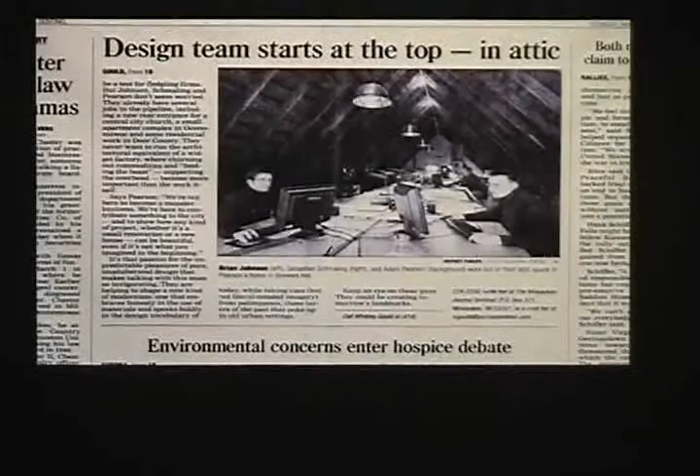This happened the week after we officially opened our business, and the journal ran this story about us — young guys starting a new design studio in an attic. In fact, it was through this very article that we got our first two commissions. You can imagine the pride, seeing this big picture of our office space in the attic in the newspaper. But it was that same image that triggered a chain of unfortunate events that almost did us in before we could get fully operational.

What happened was that somebody, and we have our suspicions who, saw the picture and contacted the city to complain about us operating a business out of a home on 2nd Street. It turned out that was totally illegal, against all zoning rules, as well as all the electrical wiring we'd done after hours without pulling proper permits. Really great start for young architects to prove their acumen. The inspector who showed up to survey the crime scene was not amused, and a few days later we received an official eviction notice forcing us to abandon the attic immediately and find a new space for our studio. That was barely two weeks after we had started.

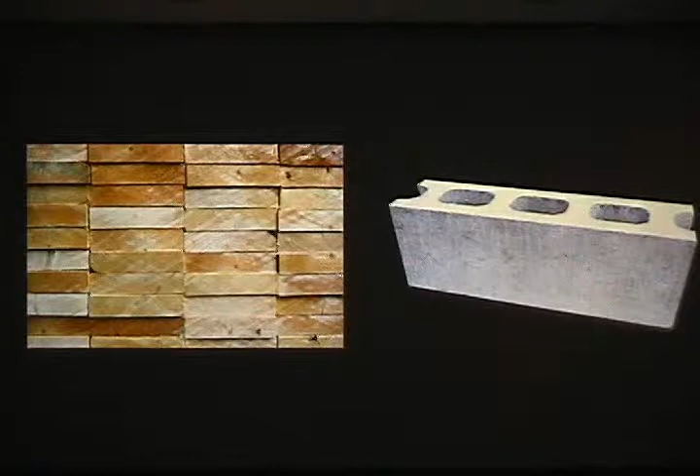I think part of what is getting lost in this current dynamic is our ability to hold on to the concept of restraint and simplicity as fundamental architectural virtues. We are losing our ability to make do with what is at our direct disposal and within our reach, like dimensional lumber, concrete block, or standard steel sections, and then to transform these simple things into relevant architecture that transcends the inherent utilitarian nature of these materials.

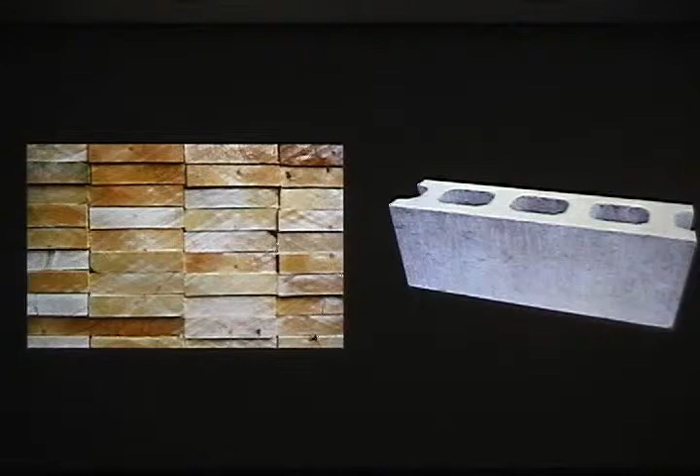Restraint plays a key role in the design process of our office. Brian and I think that restraint is our willingness as architects to approach context again with a sense of humility. It's our ability to step back and to listen respectfully to what exists, and to embrace the idea that a building doesn't have to be flamboyant or outrageous or loud in order to be relevant architecture.

I believe it's that willingness to listen which ultimately allows a building to connect to the landscape so that it evolves out of it rather than just sitting on it as a self-referential object. And I suppose this is what we are trying to do in our work.

So let me jump into a handful of projects that I hope will illustrate our attitude. The Camouflage house was completed about at least 7 years ago. So it's been a while, but I think it's still a good example of how we approach context and try to transform it into a palette of architectural operations that inform the design of the building.

The site for this project is a heavily wooded, narrow sliver of land on a steep bluff overlooking Green Lake, which is about 2.5 to 3 hours up north here from Milwaukee.

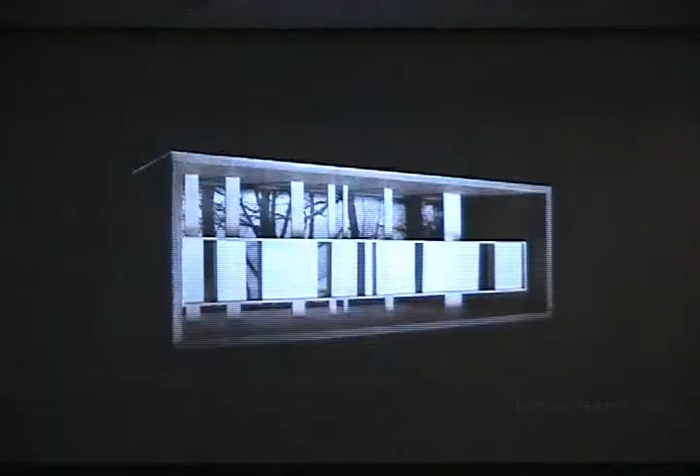Our early conceptual studies focused on the colors and textures of the surrounding woods, starting with the verticality of the trees. One of the conceptual models that we made was this shadow box, where we explored the rhythmic shifts between tree trunks as you move through the forest.

Captured here in a series of photographs where we illuminated the model from behind, you can kind of see how the foreground shifts against the background. It was something that we found sort of fascinating, and something we tried to capture in this building.

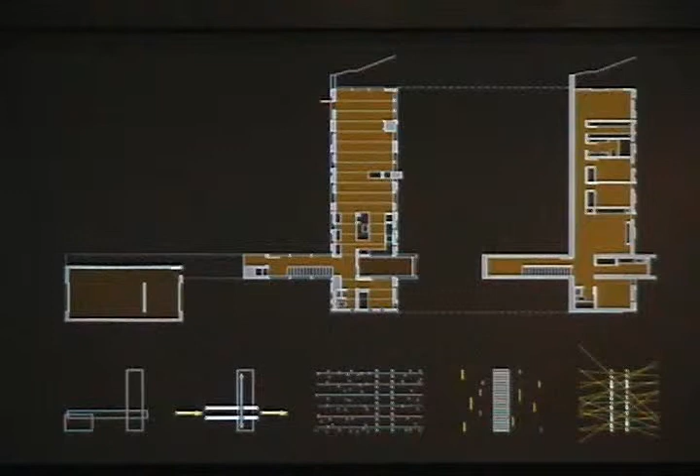The house is a simple bar building nestled into the hill. In plan, you enter the house from this clearing here. There's a detached garage connected with an open breezeway to a glass foyer that pierces through the main bar and then terminates into this balcony overlooking the bluff. The main level itself, where you enter, is an open living hall with kitchen, dining, and living spaces. That open space can extend into the top portion of the bar, which is a screen room separated by the living hall with a retractable glass door.

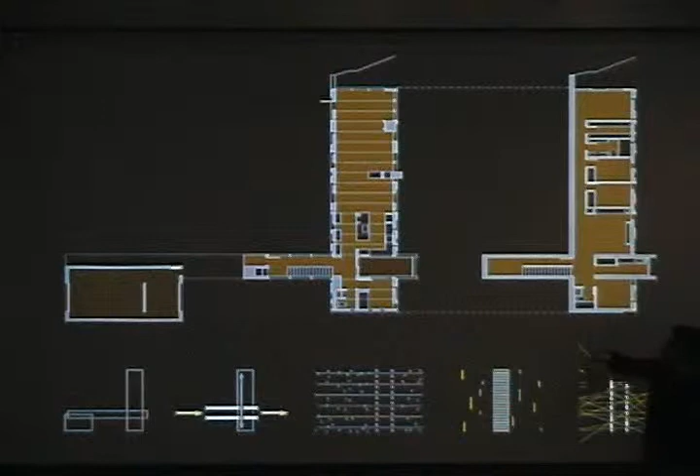Then you go down the stairs into a partially submerged lower level. It's open to this side, and then there's a long retaining wall. There are bedrooms and a family room, and then access to the bluff itself.

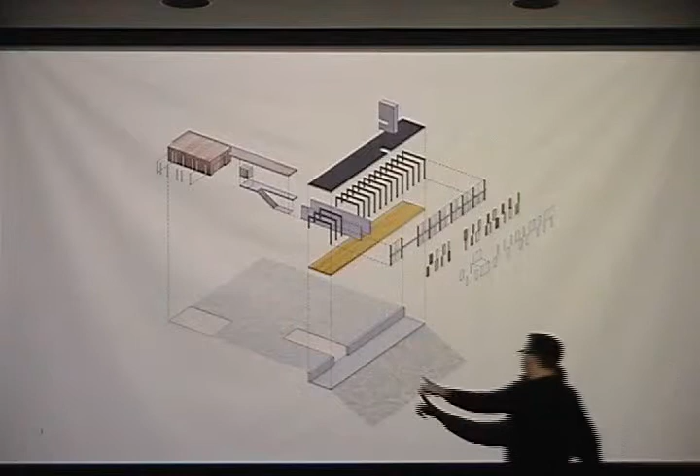This axon here shows the main building components, including the various layers that make up the facade system. You can see it's a simple post and beam structure that sits on a concrete shelf that forms a retaining wall cut into the hill. In the model, it shows the sectional relationship between the bluff side and the clearing, the higher portion of the building where you enter.

The concrete retaining wall we saw comes from that concrete shelf shown earlier. We added wood boards to the formwork, including wider boards that pick up the structural lines of the house, with smaller, more narrow boards randomly spaced in between. We then pulled the boards off the concrete formwork slightly before it was fully cured to achieve a rugged surface, and filled some of the reveals with new milled wood boards to increase the haptic quality of the wall, since that's the wall you walk by entering or going into the bedrooms on the lower level.

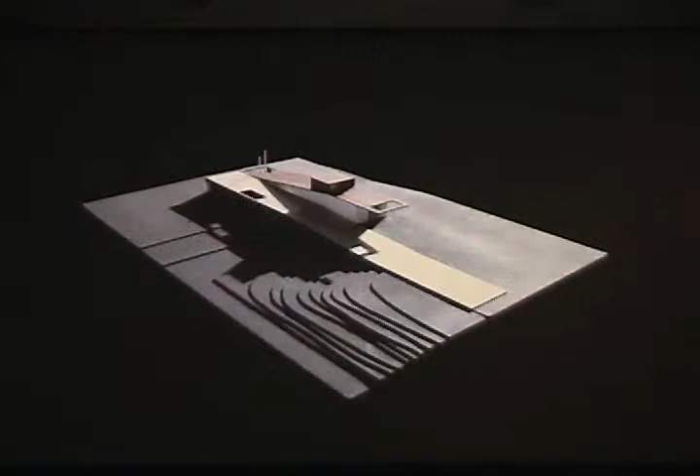This was followed by several generations of study models in which we transformed that first abstract concept study into a more tangible building form, until we inserted program elements and arrived at two staggered parallel bars that form a low-slung volume with a roof plane that extends the grade over parts of the house and then slowly peels itself up from the ground.

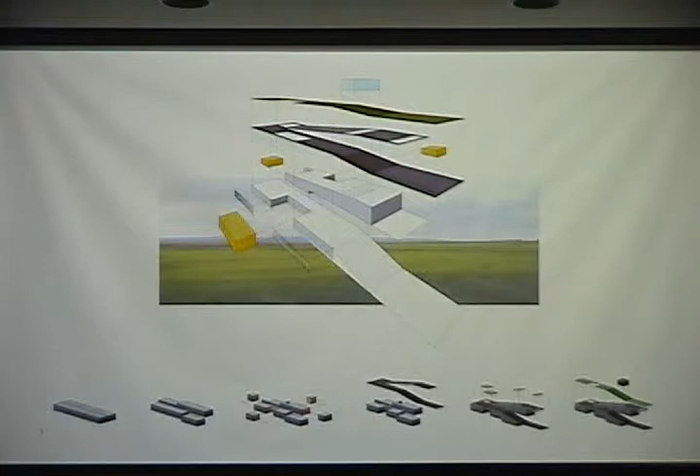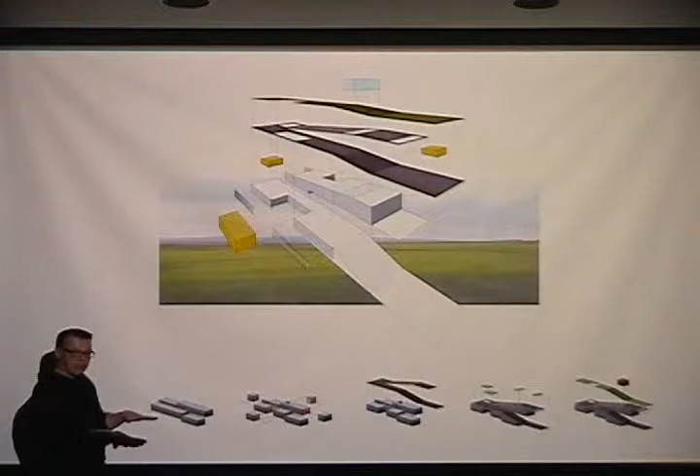The series of diagrams here at the bottom show the formal evolution of the building. We divided the program up into 4 separate volumes that we started shifting vertically against one another, following the topography of the site.

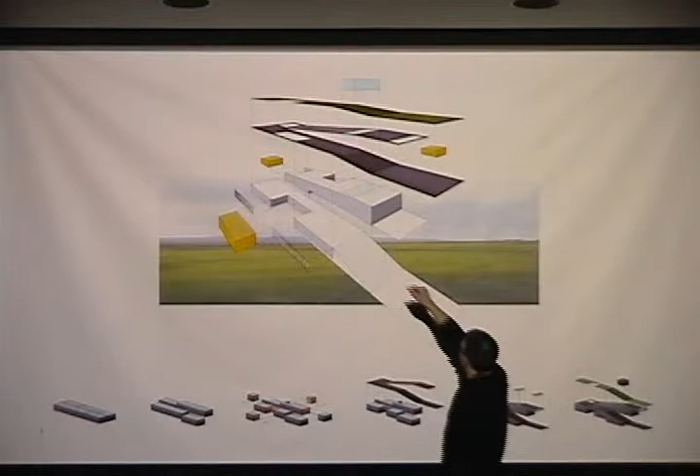Then we pulled these yellow volumes out of the overall form of the building, which became outdoor rooms that provide protection from the strong winds that are constantly shifting in this area, providing protected areas accessible from the inside.

The volumes and courtyards are then unified by this gently rising copper roof ribbon that you see in the axon, that brown element, folding up from the ground plane and terminating in a dramatic cantilever. Then you see the green roof that laps the vegetation from the side over the lower portion of the building, tying those two elements together.

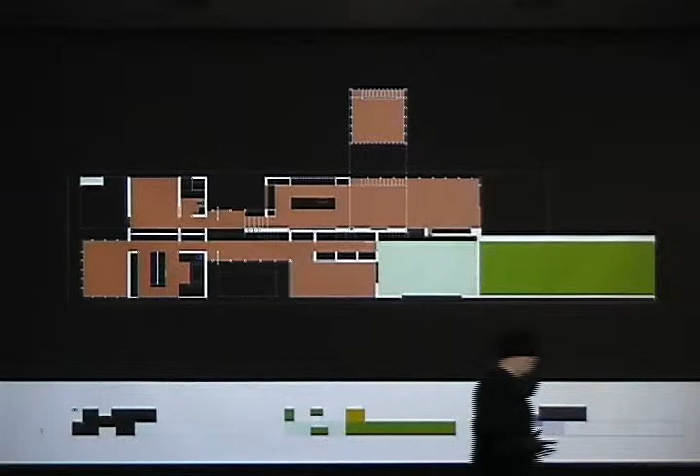The plans here show the relationship of enclosed and open spaces with a central spine that connects them. The diagram at the bottom is basically a Nolli plan of our project, and you can see this ambiguous footprint that the house has, which subverts the boundaries between what's inside and what's outside.

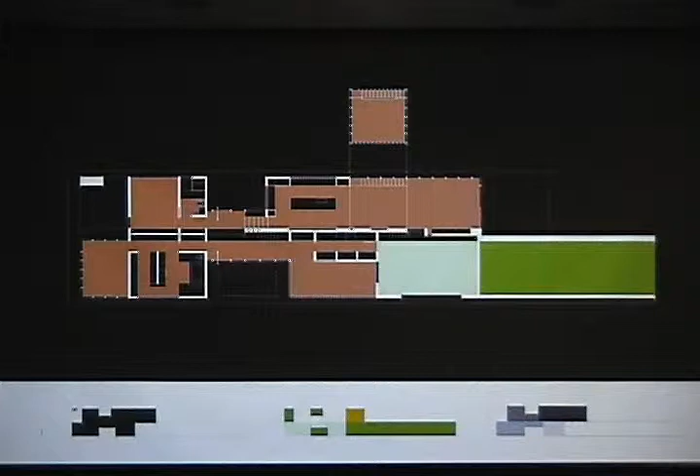The last diagram in the right-hand corner shows the different floor plates in different shades of gray, changing elevations in relation to one another. These floor plates rise up along with the topography of the place where we positioned the house, with the light gray showing the lowest elevation, and the dark gray the part of the building at the highest point.

The section model at the top shows a little bit of that internal topography that these shifting floor plates create as they follow the site topography, with this observatory at the very top.

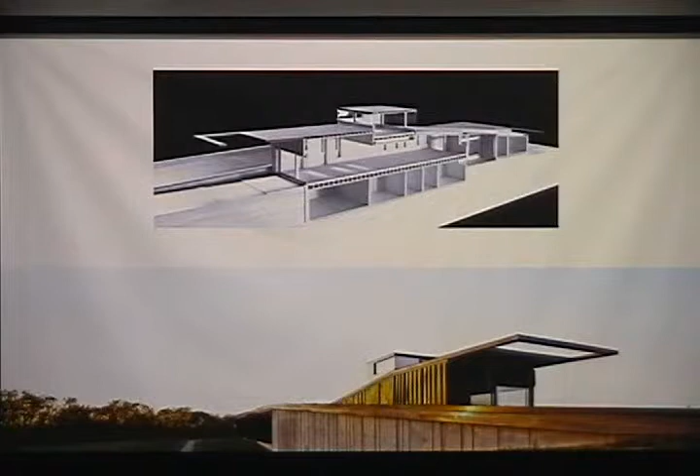At the bottom, we are looking at the edge of the roof plane. You can see that copper line that is basically continuous and slowly rises up over the lower part of the building, then folds back before it cantilevers over the edge of the house.

This is a view standing on the lower green roof looking south, and you can see where it turns into that folding copper roof plane as it slopes up in the back of the observatory.

And the living room then opens up to a south-facing patio that is protected by the long roof cantilever. The material palette of the building is basically limited to cast-in-place concrete, copper, and integrally colored fiber concrete panels, all materials that are extremely durable and can weather and age gracefully.

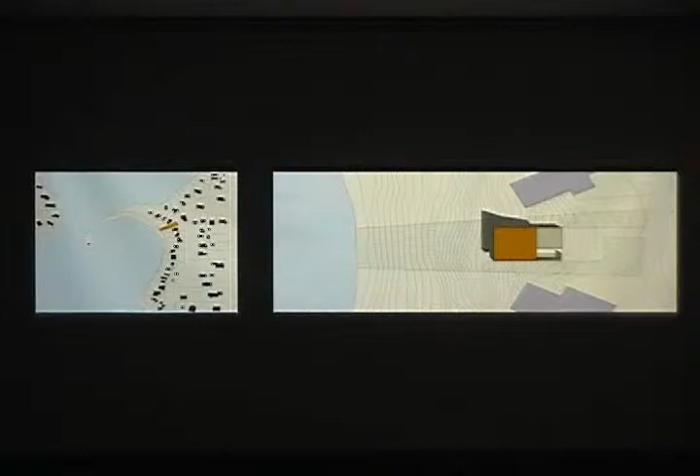And so in a way, this project became an exercise in context avoidance, if you will, and it compelled us to design an introvert building that could basically function as an optic filter that would frame the views that are desirable and then edit out those that were not.

The courtyard leads to a transparent front door that again is framing a view of the lake beyond. And in the courtyard, you are basically in a transitional space that takes you from the suburban reality on the outside into an aesthetically controlled realm.

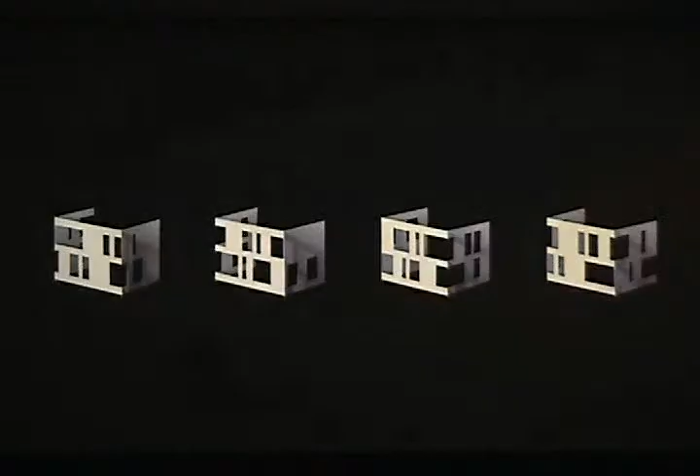So for us, this meant conceptually to take the existing context and censor everything we wouldn't want to see. This conceptual graphic became the starting point for a series of study models of the building envelope itself, which helped us explore which arrangements of walls and windows would harvest the most unimpeded views, and ultimately what they would do compositionally to the exterior.

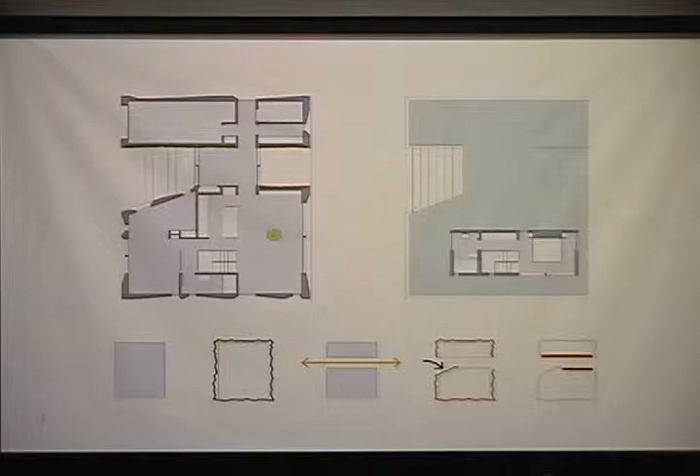This cedar wall leads into the entry vestibule, pierces through the volume, and reappears on the outside here, in a covered outdoor room on the opposite side of that entry courtyard we saw. That room opens up into a long linear patio along the edge of the woods.

The concrete podium was carved into the hill - I'm talking here about that diagram to the left. That concrete podium was carved into the hill, and it provides storage space for equipment, and also serves as the base supporting the linear studio volume above.

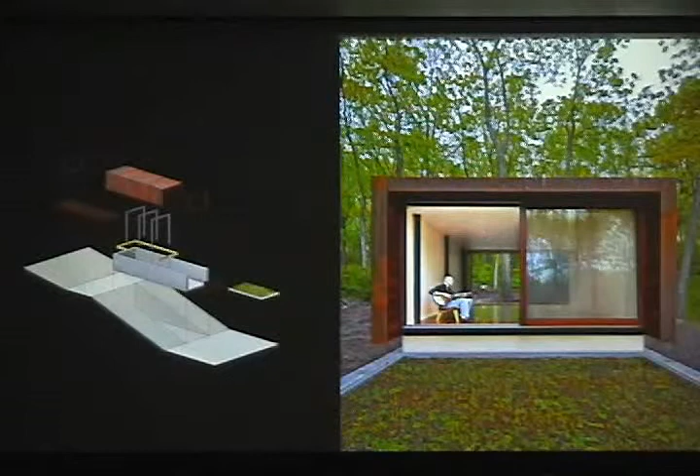The long sides of that volume are covered by the weathering steel shroud, which is slightly lifted off the concrete plinth to reveal a narrow clerestory below. With this clerestory, we allowed the studio volume to seemingly float above its base, but also to provide natural light into the storage space below, and to emit a sort of luminous glow into the landscape at night.

The plan view of the studio: a very simple rectangular space with large glazed openings on either end, here to enter into the studio, and here to go onto the green roof of the concrete plinth.

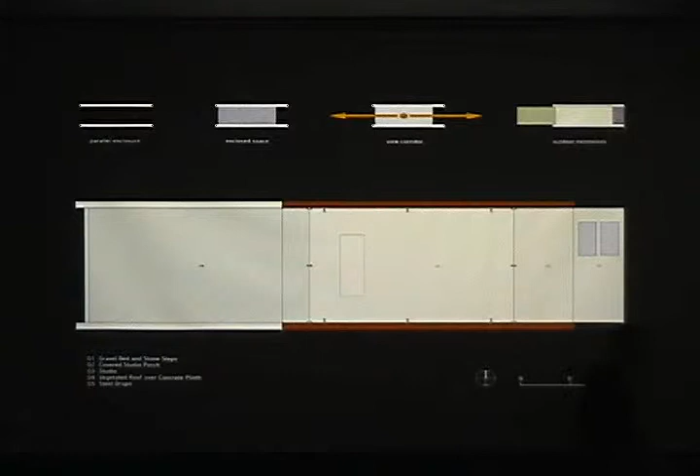For the steel shroud, we purposefully kept all the alloy imperfections, surface oils, and roller marks from the steel mill untreated, to create a sort of unpredictable and ever-changing veneer that would contrast with the formal rigor of the building itself.

The thing about this project is that it's utilitarian and raw, and it is very clear about what it does, and in that sense we think it continues quite faithfully the tradition of Midwestern pastoral architecture and its legacy of aesthetic simplicity and robust craftsmanship. I think this is why the building looks like it belongs to the site, almost like it's always been there.

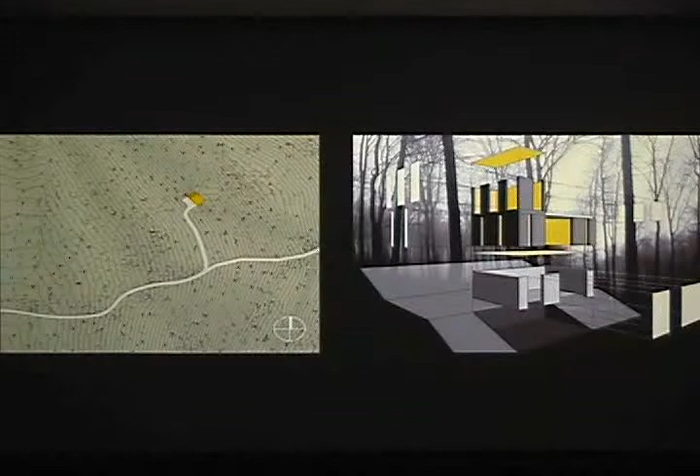This next project was designed as a small getaway for a young family from Chicago. Just like the studio, it occupies a site in the woods in central Wisconsin. The building sits at the end of an old logging road and hugs the sloped edge of a small clearing deep inside the woods. We called this project Stacked Cabin.

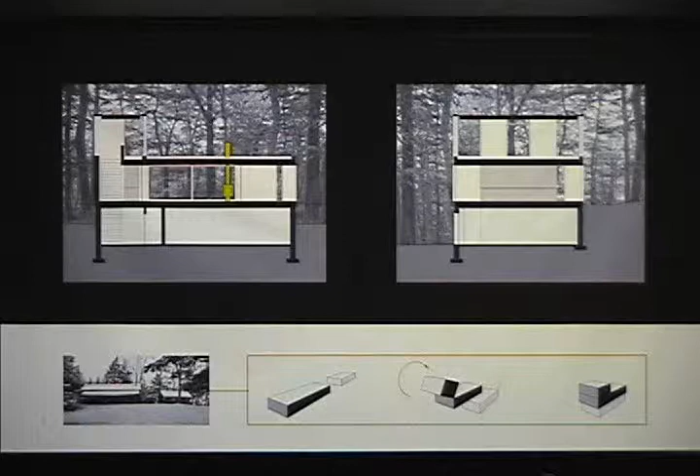We took those components and stacked them vertically, which allowed us to minimize the footprint of the building on the pristine site, and then take advantage of the slope of the site and the views into the treetops that a higher elevation would offer.

The lowest level of the cabin houses a workshop, a washroom, and the building infrastructure. You enter the building through this door, and there are stairs right behind that lead up to an open living hall above. That living hall is centered around a stove and bracketed by a simple galley kitchen on one side and a pair of small open sleeping rooms on the other.

You can see those floor-to-ceiling curtains on either side of that living space, which can be arranged to provide privacy for the bedrooms or visually screen the kitchen when it's not in use.

Then at the top of the cabin, we stacked what was originally conceived as another space adjacent to the living room, to create a more intimate and elevated observatory with pretty spectacular views into the treetops and beyond — a place that can function as an overflow bedroom for guests, or just a way to get away from the action of the kids on the main level.

Okay, so the projects I've shown so far have all been pretty much small scale and mostly residential, which is a pretty honest representation and cross-section of the types of commissions that we have worked on over the first decade of our studio's existence.

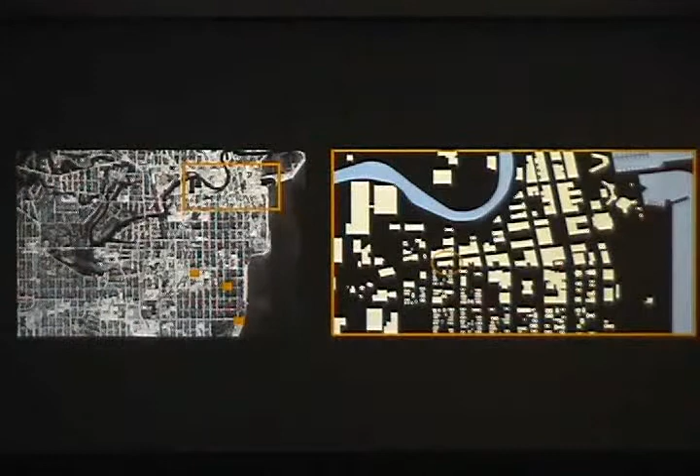In any case, I'm not going to talk about this project anymore, but the new art gallery and art studio building will sit on a site located a bit further up north in the downtown area of Racine.

What's interesting about our site is that it's located right where 2 major street grids in Racine collide, one gridding the city at a slightly different angle than the other. And where they collide, they create a sort of row of trapezoid or rhombus-shaped blocks.

This graphic here, by the way, was a representation of the ambition of the owner to create a cultural anchor at the western side of downtown. It sort of brackets downtown with the Racine Art Museum, a pretty handsome building by Brininstool + Lynch from Chicago. It's probably 10 years old, but probably one of the nicer buildings of contemporary architecture in Racine since the demise of Frank Lloyd Wright, of course.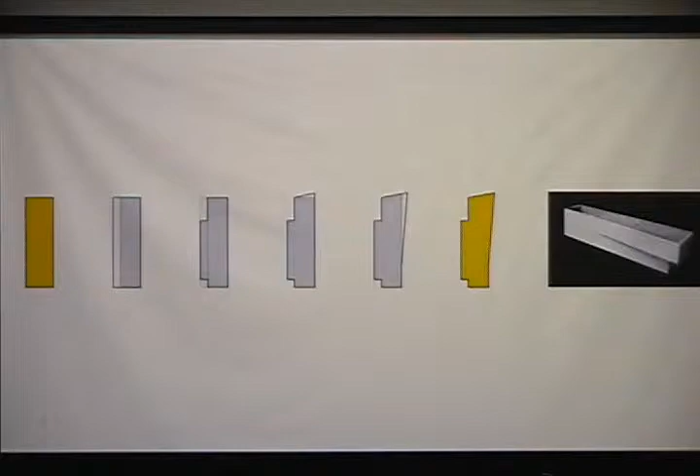The glazing in front of the ground floor gallery, enclosing the ground floor gallery, opens views through the building and then frames the view of that old signage behind it. You can kind of see that sneaking through there, right? The studio volume above is wrapped in a curtain wall with transparent and translucent glazing and tightly spaced, very deep vertical louvers, creating a robust, deep, and rhythmic facade that reads against the smooth articulation of the gallery base below.

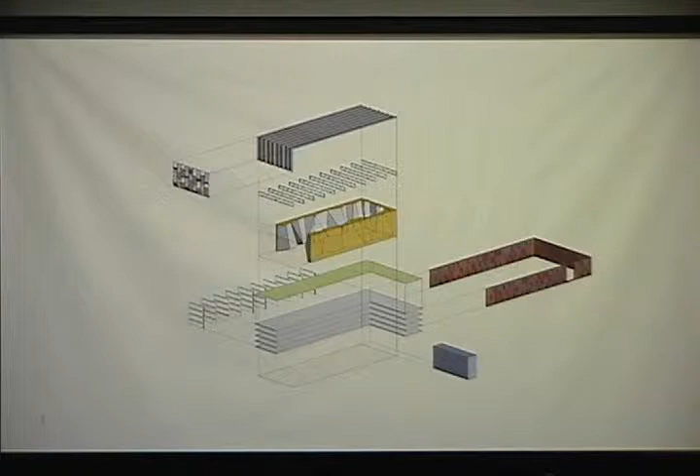One of the challenges was how to address an urban street corner with a program that essentially requires a windowless big box, not unlike many warehouses or manufacturing buildings in the suburbs, and not unlike the facility that Adventure Rock, the operator for that rock climbing gym, is in right now in Brookfield. But by shifting the gym volume slightly beyond the housing complex, we created a vertical window wall that turns into a clerestory at the top and allows for glimpses into the building from the street. So it becomes the marker of the building and the signage of the building.

Something that happened in a bar, if I remember correctly. The idea was using some material that could be randomly folded to create that highly textured facade. We first thought of cast-in-place concrete panels with different types of form liners, but it became clear very quickly that the tight budget required a much more conventional approach. So we experimented with different ways to install various layers of off-the-shelf sheet goods to achieve the effect we were looking for.

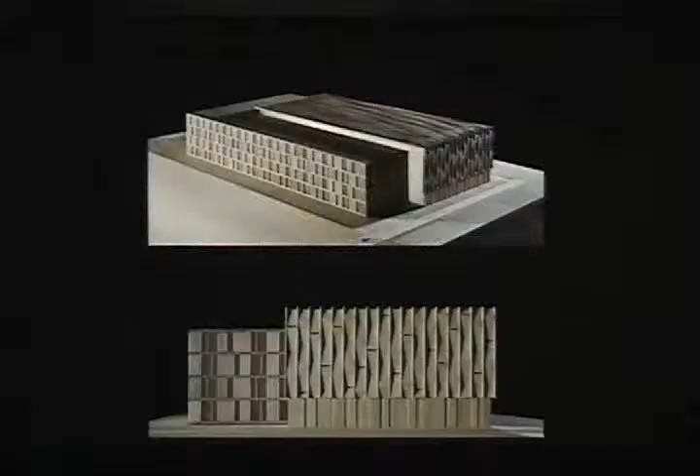Here you can see the final model of the building, with a rock climbing gym interlocking with a housing block, creating this long clerestory around the top that allows rock climbers inside to see the city skyline, if they're skilled enough to climb all the way up.

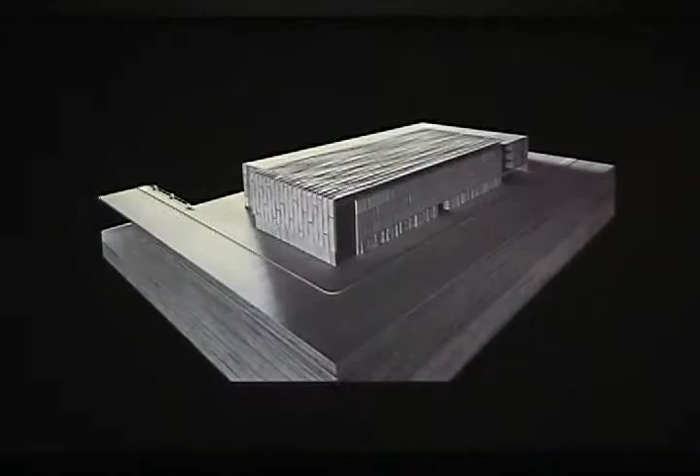And then finally, let me finish with a project about beer. After all, we live in Milwaukee, right? And beer is part of our DNA. We were asked in 2006, I believe, to reimagine the public spaces in the former Blatz Brewery downtown, which consists of a series of beautiful, interconnected masonry buildings on the National Register of Historic Places. After the brewery closed in the early 1980s, it was converted very cheaply and ill-conceived into offices and apartments.

The doors can be rotated so that they close off the adjacent lounge when there's some private function, or open up that space as an expansion of the lobby, depending on the use of the lounge.

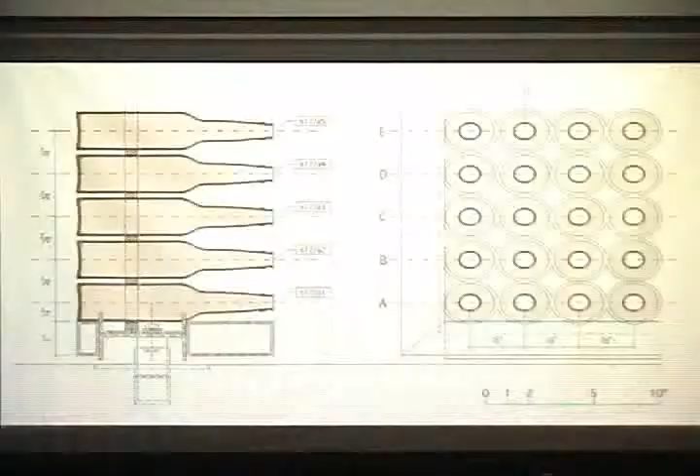We found 400 bottles in the basement of the brewery, which apparently had never been cleaned out after the brewery closed in the early 80s. The remaining 6,000 bottles were purchased from the same local factory that made the original bottles, which is still in business and still has the dies for those bottles. That was important because these neoprene rings had to be fitted for a consistent bottle size, so we couldn't just use bottles of a different dimension.

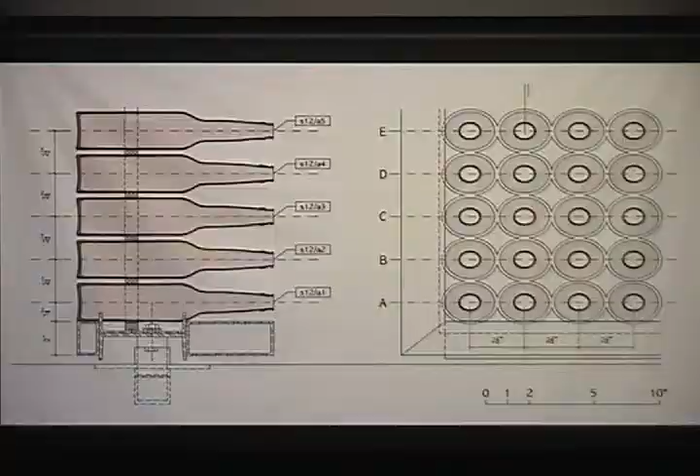Depending on the position of the panels, they turn into backlit screens for the lobby, or function as amber-colored lenses that bring light into the lounge.

So this final image here is perhaps the perfect segue into the next portion of this evening. I hear they serve alcohol, so it seems promising. Thank you very much, and I'd be happy to take questions if there's time.

It depends. We have been asked to evaluate sites, but most often people already have a piece of property, and we're open to almost anything, because every site has something intriguing or interesting for us to explore. If you look at something like that suburban site, it's probably a site we wouldn't have chosen for somebody, but it's something that creates a thought process that turns into interesting architecture.